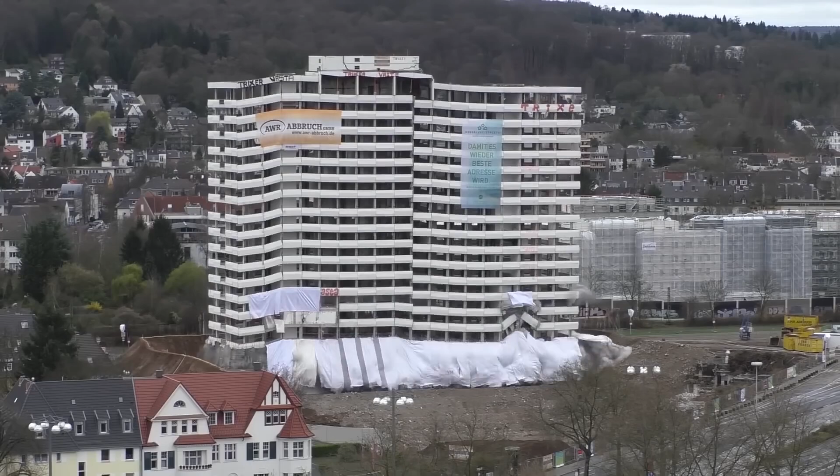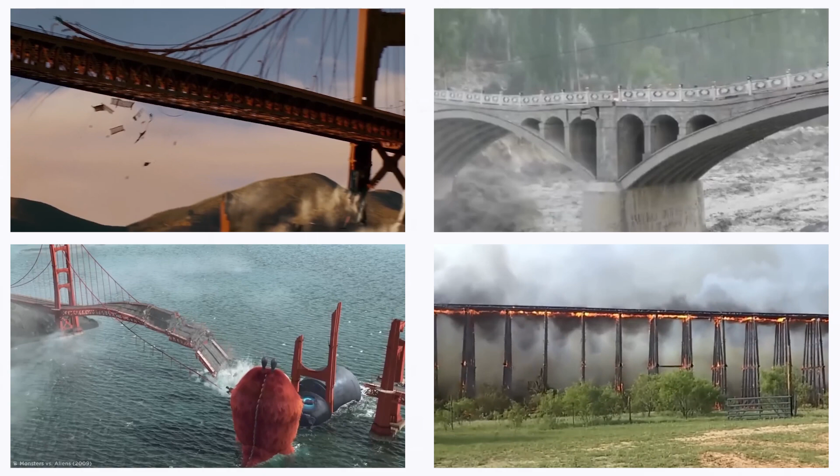Some building projects fail miserably, leaving behind shocking catastrophes that cost millions of dollars and cause terrible casualties. Others succeed in becoming masterpieces. From bridges that fail to open to buildings that lean dangerously to one side, some blunders are so big they become famous. Not only mistakes, but lessons picked up the hard way. A list of the 15 most egregious building blunders ever made.

Number 15, Sampoong Department Store.

What follows is a sad tale. It was entirely preventable, but hundreds of lives were sacrificed nevertheless. A landmark of South Korea's booming economy was the Sampoong Department Store in Seoul. A 5-story high-end retail store was crammed into what was originally a 4-story office building in 1987.

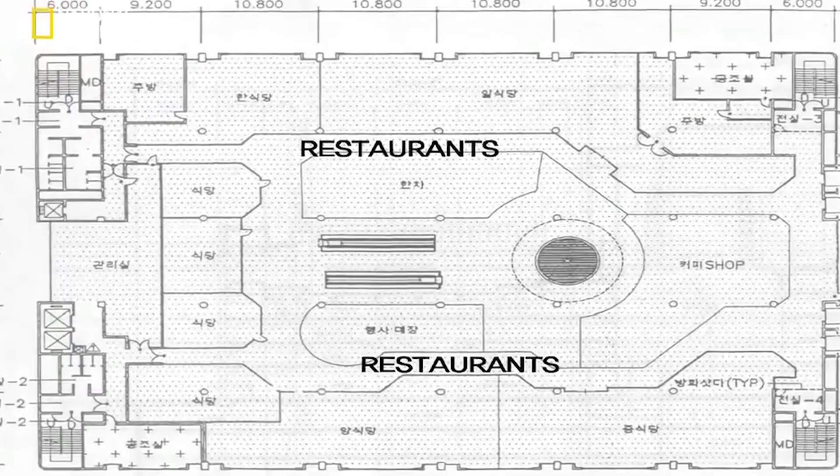The designs were revised on the fly during construction. In order to install the escalator rails, it was necessary to cut corners, such as removing support columns and placing a massive air conditioning unit on top of the building, which weighed 45 tons. The structure first welcomed 40,000 guests per day upon its opening in 1990. But these hasty adjustments led to serious flaws in the structure.

Tragically, 502 people were killed, and 937 were injured when the whole south wing of the building fell in less than 20 seconds on June 29, 1995, at 5:52 p.m. For its time, this building fall was the deadliest during a period of relative calm.

A disastrous pancaking effect occurred when the 5th story broke way under the weight of the air conditioning equipment and the building's defective construction. The worst thing is that management disregarded warning signs of fissures developing months prior to the accident. A combination of carelessness, avarice, and lax safety regulations led to this catastrophe.

It was not an accident. Discover the devastating consequences of taking shortcuts from South Korea to New Orleans.

Number 14. AquaDom. They boasted about it as the biggest cylindrical aquarium on Earth, but none anticipated that it would endanger the same species it was designed to save.

An impressive 82 feet in height, the Berlin AquaDom housed 1,500 tropical fish in 1 million litres of water and was a sight to see. With its breathtaking aquatic exhibit and elevator ride into its heart, the Radisson Blu Hotel's aquarium became a popular tourist destination after its 2003 opening.

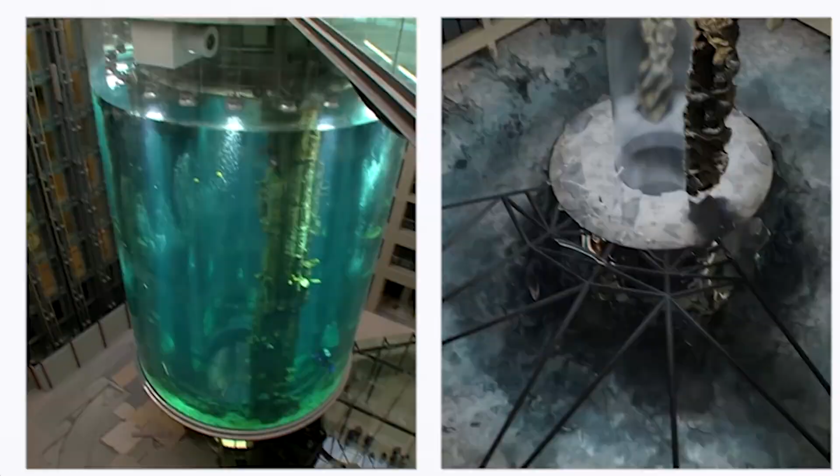In the end, it was determined that the collapse was caused by a long-lost structural defect in the floor. Despite its eye-catching appearance, the one-of-a-kind acrylic substance eventually developed microfractures due to the continual pressure from the water. These vulnerabilities were exacerbated by environmental conditions, such as temperature variations, which ultimately resulted in the catastrophic catastrophe.

A catastrophic event occurs when a tank explodes, while a tragic one occurs when a whole structure collapses. Number 13. Hyatt Regency walkway collapse.

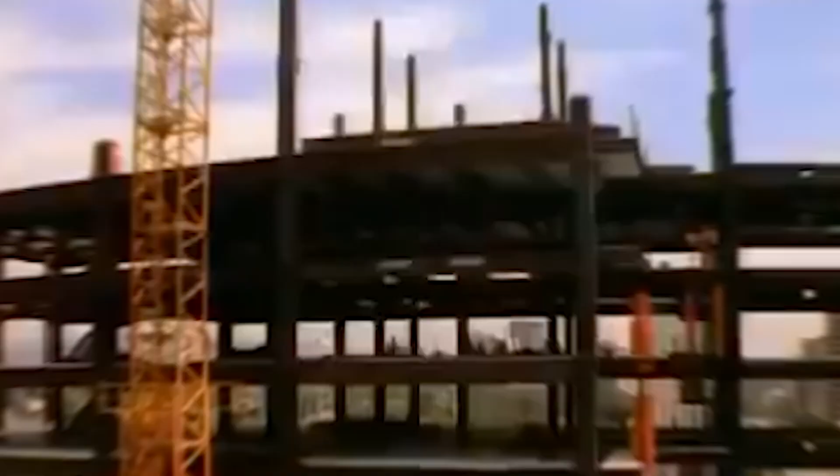A seemingly little alteration made to wow visitors in our next tale swiftly escalated into a catastrophic event. A breathtaking atrium with almost weightless pathways was a major selling point for the Kansas City, Missouri-based Hyatt Regency Hotel. Upon its opening in July 1980, the hotel immediately became associated with contemporary style and opulence. Unthinkable events occurred on July 17, 1981, during a bustling Friday night dance.

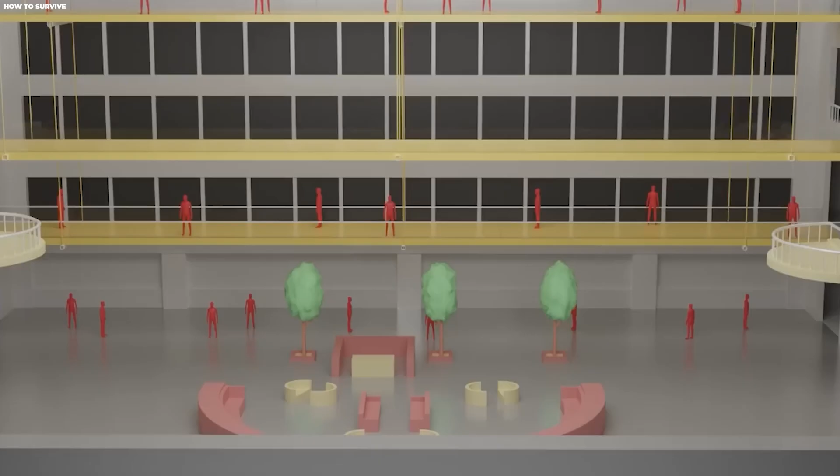Tragically, the partygoers' packed 2nd and 4th story walkways crashed into the lobby below. With 114 fatalities and nearly 200 injuries in just a few seconds, it was the worst building collapse in United States history at the time.

What went wrong? A crucial modification to the walkway support system structure was uncovered during the examination. Constructional changes necessitated the addition of 2 sets of rods, one from the ceiling to the 4th floor walkway and the other linking the fourth-floor walkway to the second-floor walkway. These were substitutes for the original plan, which called for a single set of hanger rods suspended from the ceiling.

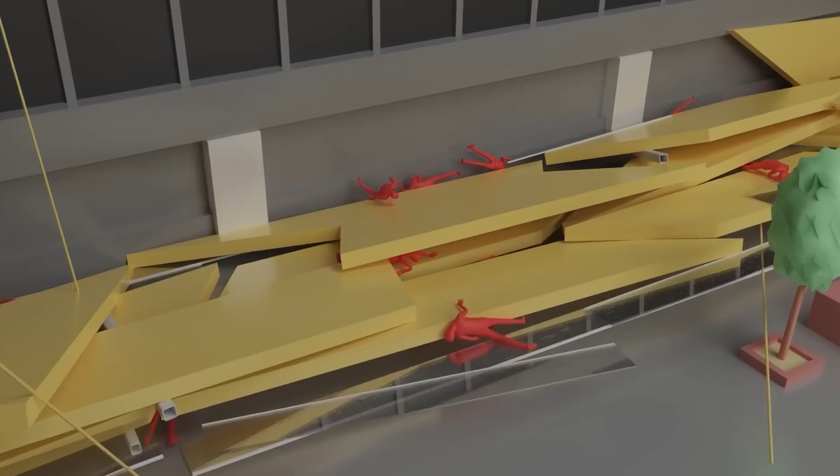This apparently insignificant modification caused the top walkway's connecting points to bear twice as much weight as they were originally intended to. Tragically, the walkways collapsed onto those below as a consequence of the connecting points failing.

Changes in engineering standards and construction rules were implemented on a national level in response to the catastrophe, which highlighted the need for engineers to guarantee the safety of their projects.

That disastrous shift caused anarchy, and as you'll see, it wasn't the first time carelessness had disastrous consequences. Number 12: Lotus Riverside Complex.

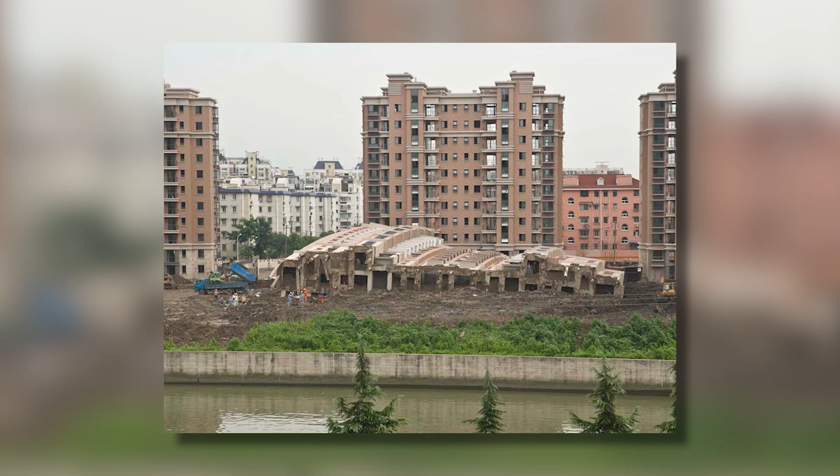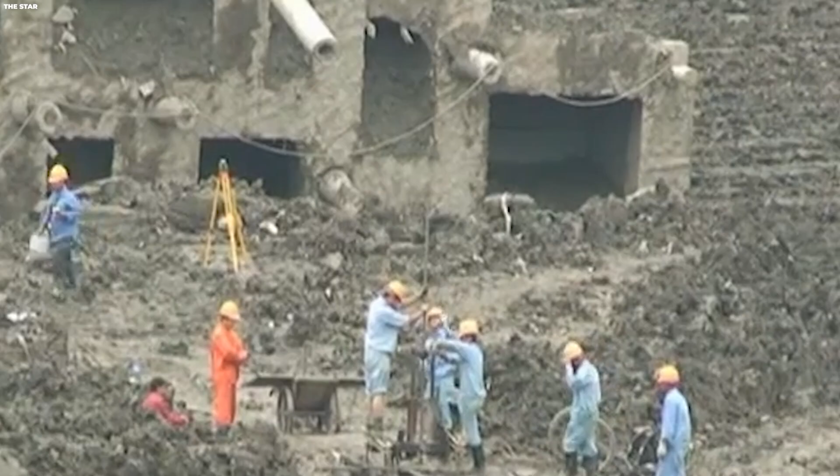How is it possible for a tall, sturdy structure to unexpectedly topple down like a massive domino without crashing to the ground? The 13 skyscrapers that made up Shanghai's Lotus Riverside Complex represented the pinnacle of contemporary city life. Built to accommodate the city's fast growth, the project's high-end apartments were ready for occupancy in 2009. Buyers were drawn to the Meidu Real Estate Company's complex in a flash because of its prime location and stunning architecture.

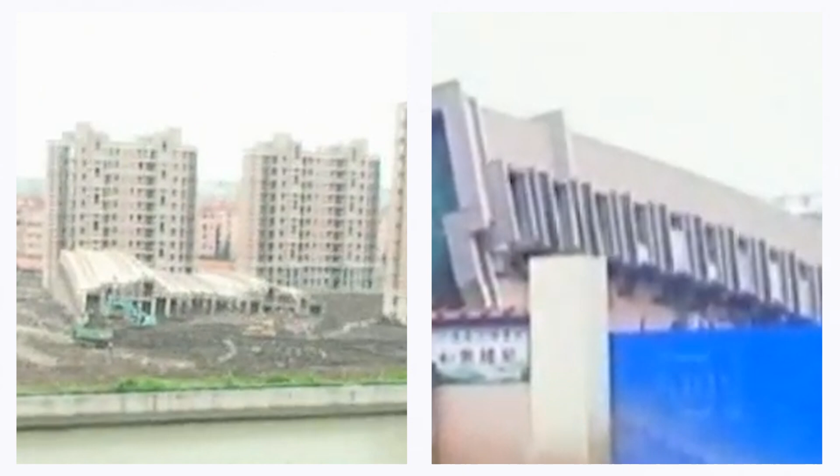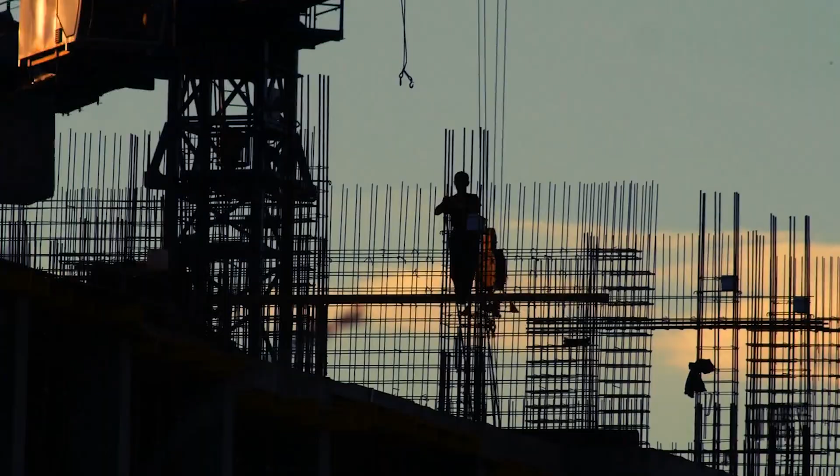Until June 27, 2009, everything seemed to be going swimmingly. One of the structures toppled over that morning, ripped from its base by nothing more than gravity and a catastrophic oversight. There were no explosions or earthquakes involved. The building's foundation had become weaker due to excavation work for an underground garage adjacent to it, which had displaced large quantities of dirt. This surprising error during construction was the main reason.

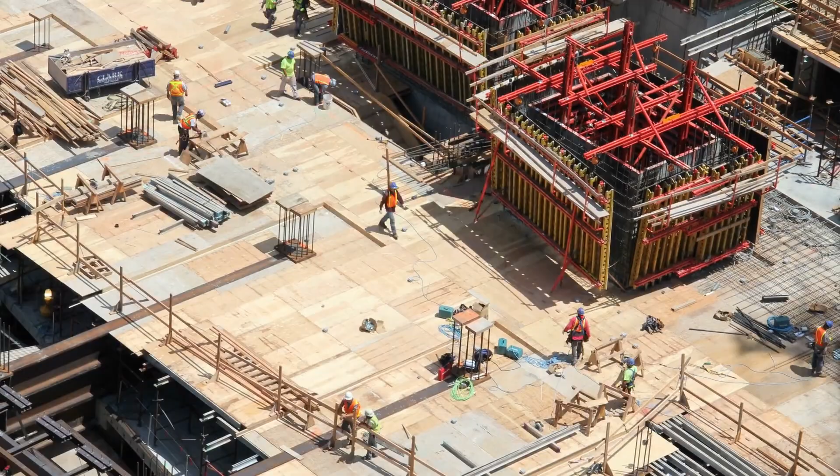The situation was made much worse by the severe rains that preceded the collapse, since the already weakened soil was unable to hold the weight of the building. Legal action and inquiries ensued from this tragedy, which should serve as a stark warning to anyone involved in building in fast-developing urban areas. As this structure crumbled, our subsequent catastrophe surged upon us like a tidal wave.

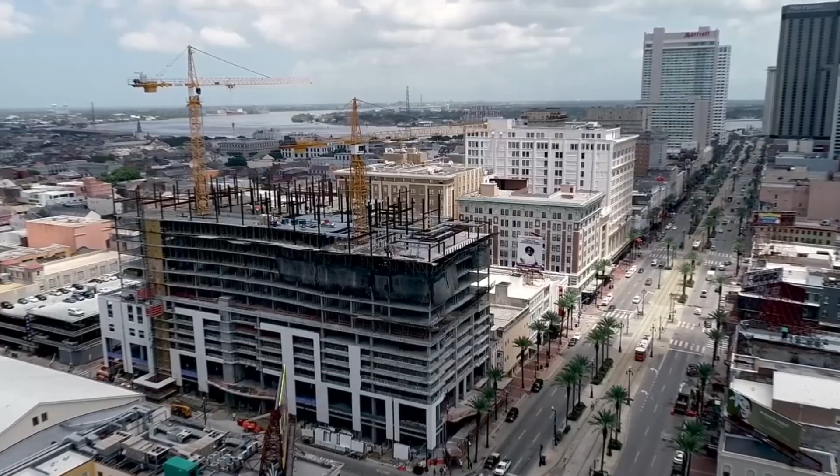Number 11: Hard Rock Hotel Collapse. In a project worth millions of dollars, what are the consequences of taking shortcuts? This was a recipe for catastrophe for the Hard Rock Hotel.

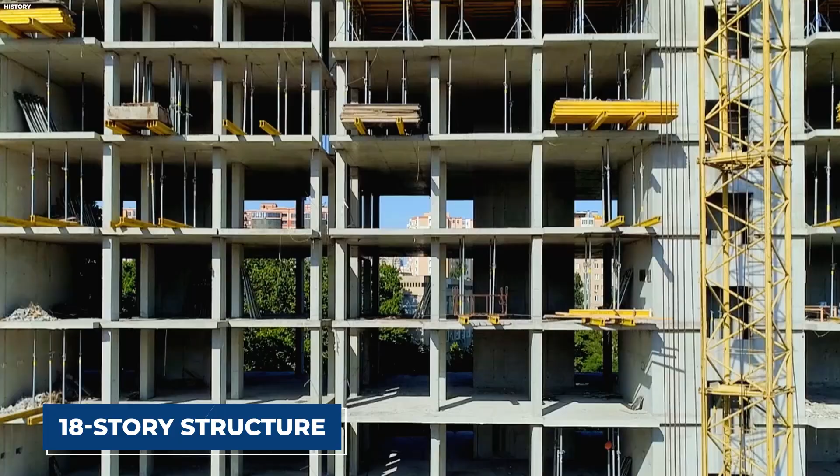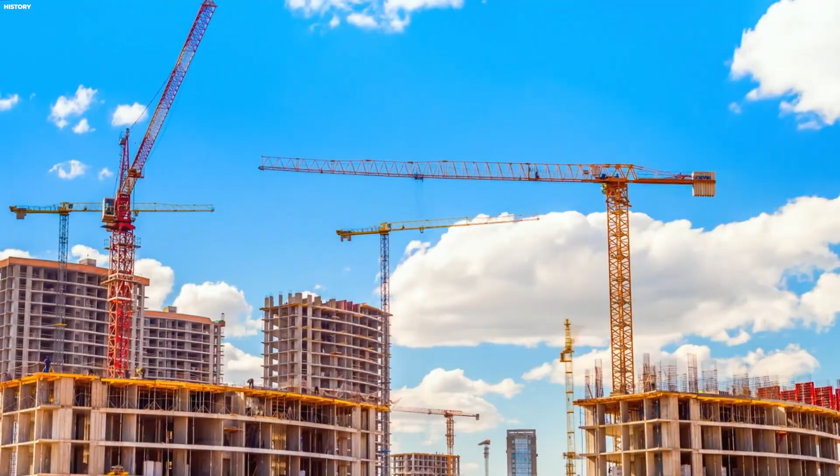An opulent 18-story structure, the Hard Rock Hotel was intended to adorn the lively Canal Street with a touch of contemporary style. A rooftop bar and pool deck with breathtaking views of the city were part of the ambitious plans that started construction in 2018. Already a prominent feature of the skyline as the project drew closer in 2019, the building was almost finished.

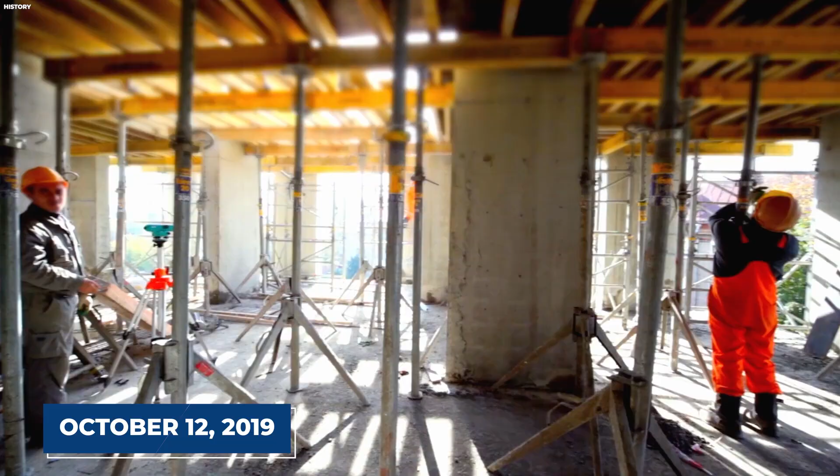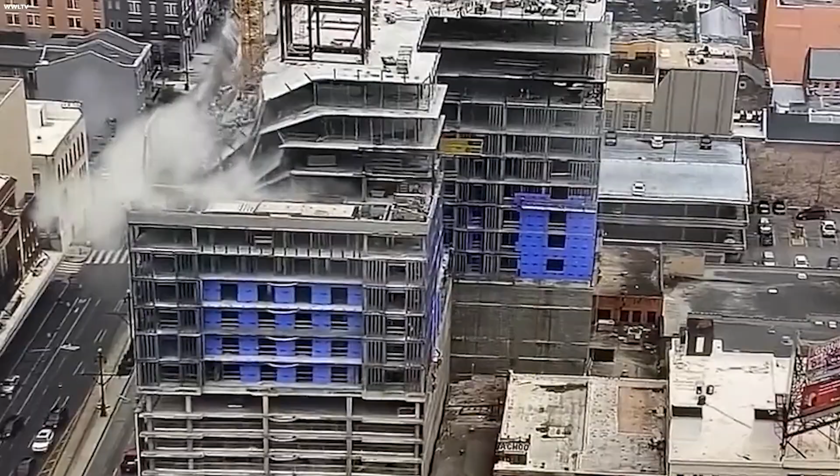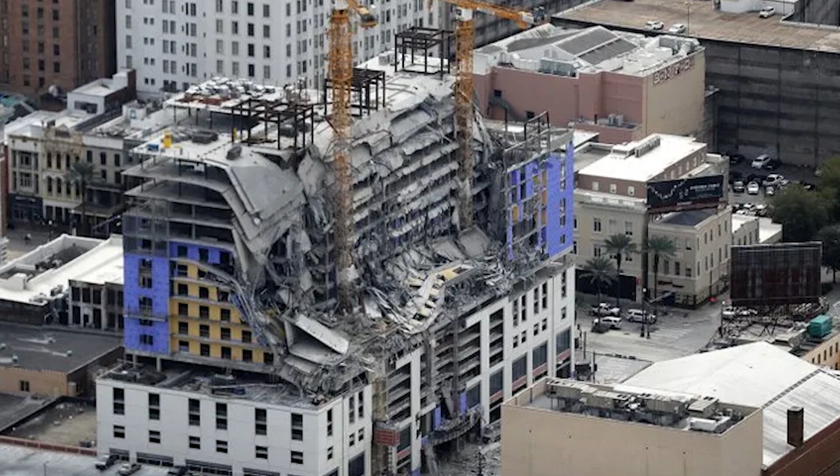On October 12, 2019, nonetheless, tragedy struck. Three employees were killed, and scores more injured, when the upper floors of the partially completed structure abruptly gave way, releasing a torrent of concrete and steel. As a section of the structure collapsed, ensnaring individuals under its rubble, debris rained down on the streets below. The population was shocked when rescue operations were hindered because the building remained dangerously unstable.

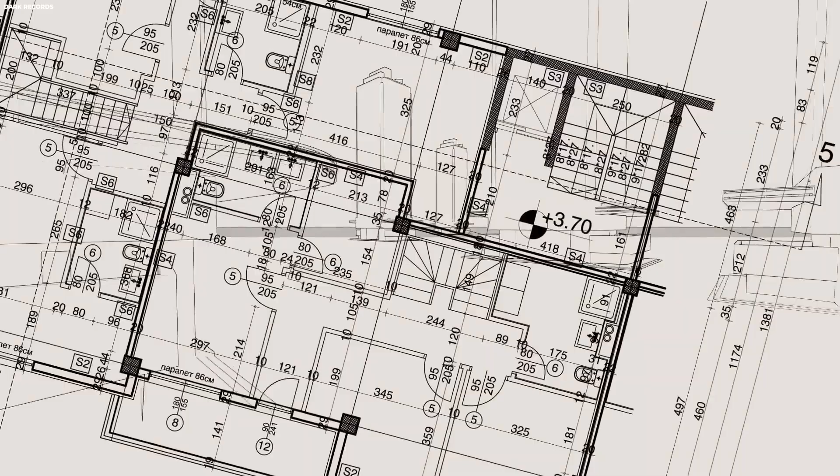Attempts to reduce costs led to the discovery of a serious defect. To allow for taller ceilings without increasing the building's total height, the steel beams on the 16th and 17th floors were significantly decreased in size. The higher floors collapsed due to the overstressing of these smaller beams, which were originally meant to support far less weight than what was really needed. According to experts, the beams were 300% overstressed, which caused the calamity.

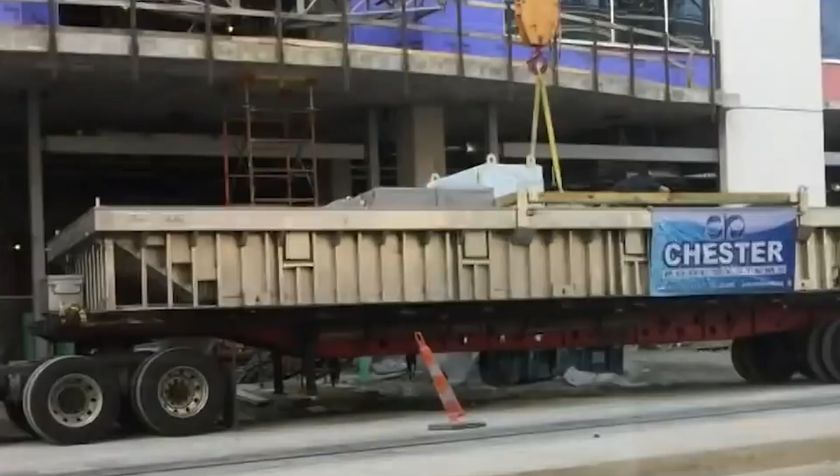But slacking off is nothing new. Negligence has disastrous consequences, as we will see in our following chapter. Number 10: The Walkie Scorchie.

Now we may discuss a structure that became an unintentional death ray despite its attention-grabbing architecture. 20 Fenchurch Street, whose top-heavy shape earned it the nickname the Walkie Scorchie, cost more than £200 million to construct and was finished in 2014. The bulbous form of this London commercial skyscraper, created by architect Rafael Viñoly, is instantly recognizable.

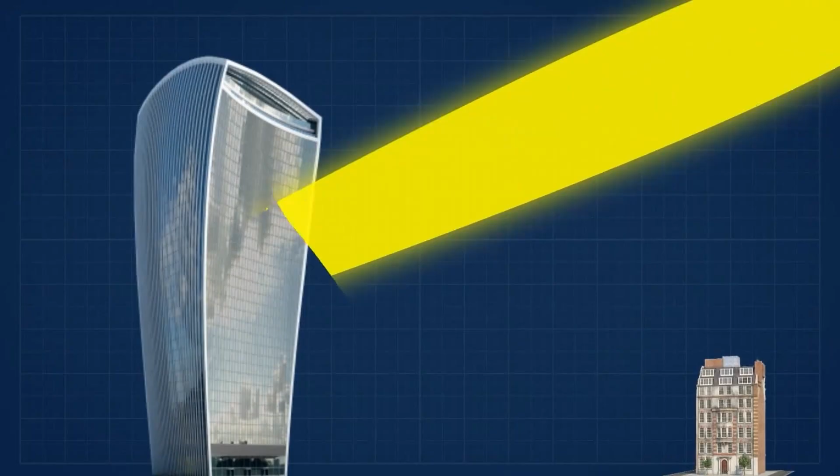Its top floors stretch outward, providing enough space for office rents and a breathtaking sky garden. But the Walkie Scorchie was a much less endearing moniker that the structure swiftly acquired. The building's concave glass exterior reflected and focused sunlight into the streets below, creating an unintended effect similar to that of a large concave mirror.

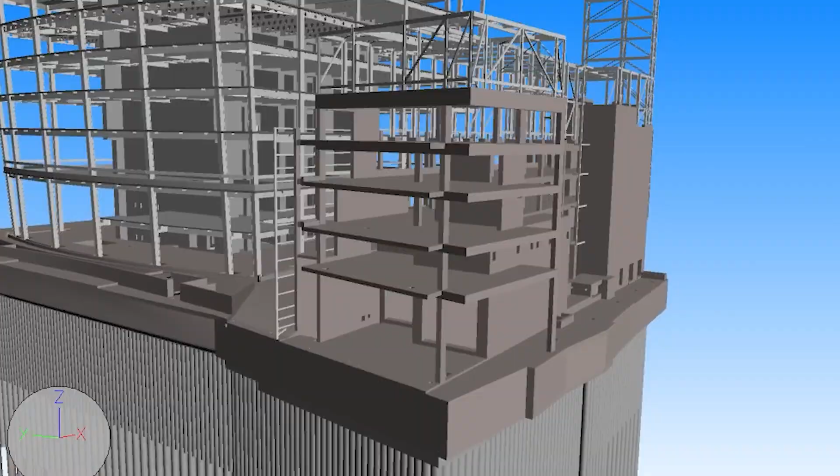Street temperatures might reach 117 degrees Celsius, 243 degrees Fahrenheit, in the summer due to the strong sunshine, which allegedly melted components of a parked Jaguar and burnt the surfaces of adjacent buildings. A local Londoner immediately dubbed the building the Frying Scraper. In order to alleviate the severe glare, quick actions were made to set up temporary screens, and subsequently, a brise soleil, a permanent sunshade, was included.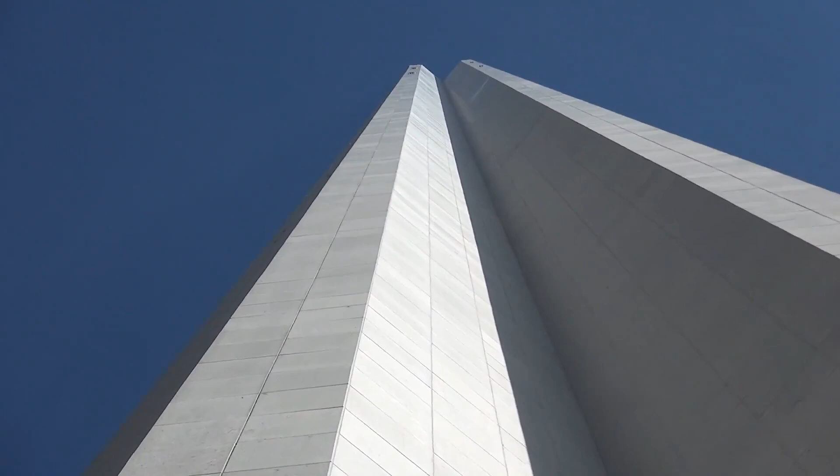With its striking facade of Italian Carrara marble, the 1973-built Aon Center in Chicago stands out from its predecessor, the Standard Oil Building. What made the structure stand out, the use of marble, also became its undoing, a huge mishap.

The marble exterior started to show signs of fissures just a year after it was finished. In some instances, whole panels, each weighing more than 300 pounds, fell off the structure, creating a significant danger for the region below. The delicate marble couldn't withstand the wildly fluctuating temperatures in Chicago, despite its aesthetic appeal.

The expansion and contraction of the marble over the hot summers and chilly winters caused the fissures. The remedy ended up being a full refacing of the whole structure, after many efforts at interim remedies such as putting steel straps to keep the panels in place failed. Sturdier Mount Airy granite was used in lieu of the original highly esteemed marble. An astounding $80 million, more than half the building's initial cost, was spent on the recladding endeavor in the early 1990s.

What transpired during the construction of the Sydney Opera House would blow your mind if you thought the troubles at the Aon Center were expensive. Number 7, Teton Dam disaster.

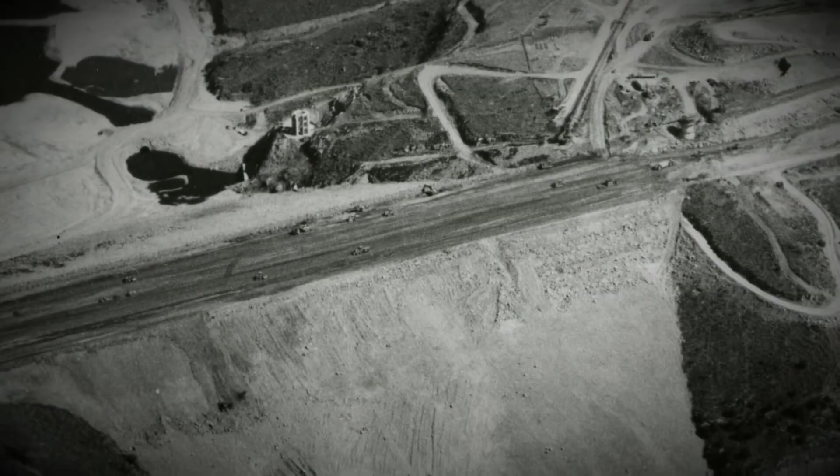A little oversight was sufficient to transform the Teton Dam into a destructive powerhouse, concealed behind its majestic walls. This dam, situated in southern Idaho, was built by the United States Bureau of Reclamation from 1972 to 1976. It was a massive undertaking with a height of 305 feet and a width of 3,000 feet, intended to manage floods and provide irrigation to the neighboring regions.

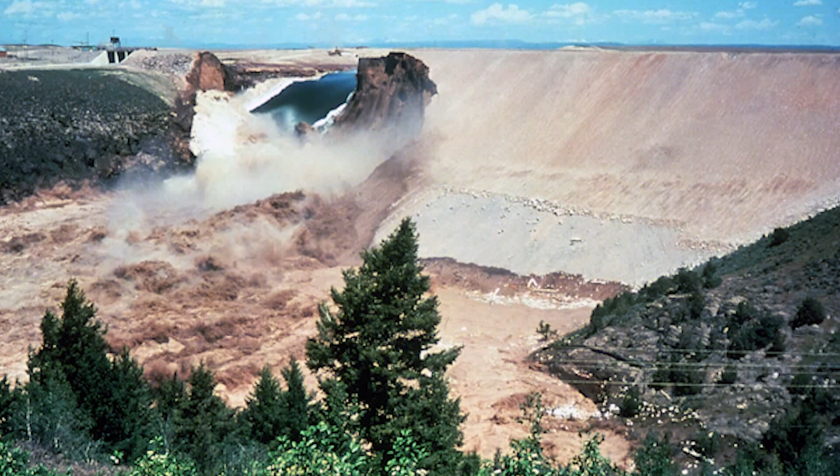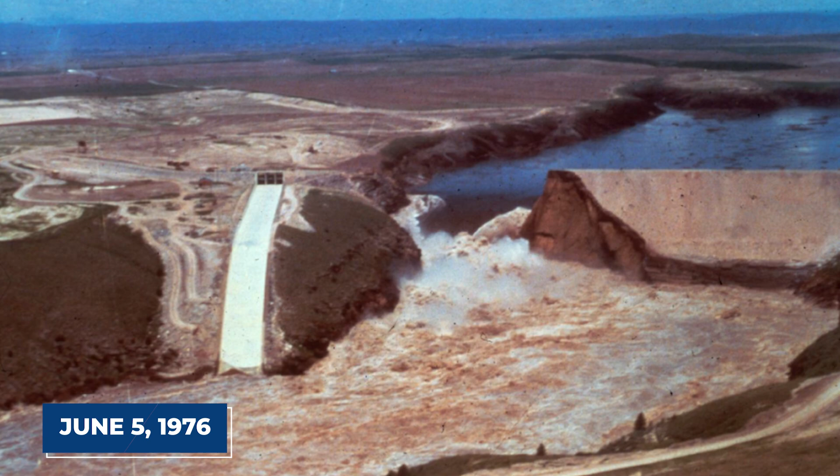The architecture of the dam was revolutionary for its time since it used compacted earth and rock layers. On the other hand, crews discovered minor dam leaks on June 5, 1976, when the reservoir was initially approaching its maximum capacity. They worked hard to seal the leaks, but it became clear that things were worse than they had anticipated.

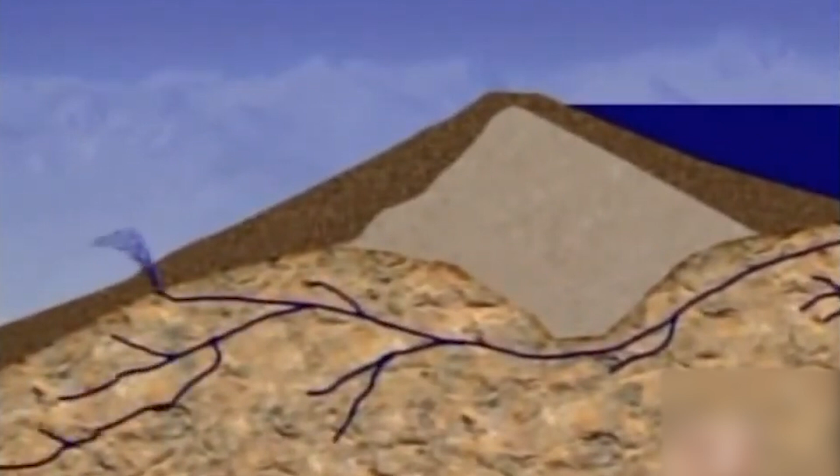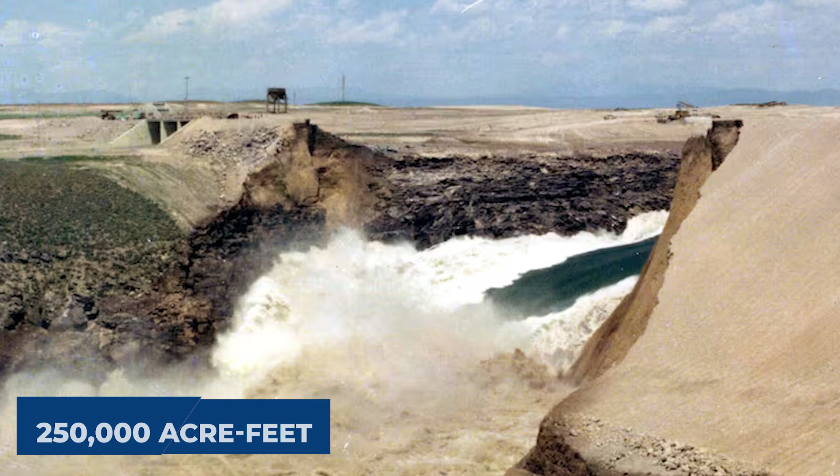Rexburg and Sugar City were hit hard when, by midday, a huge hole was opened up, and within hours, more than 250,000 acre-feet of water was spilled downstream. A 15-foot-tall water wall ripped across the region, killing 11 people, displacing 13,000 and damaging more than $2 billion.

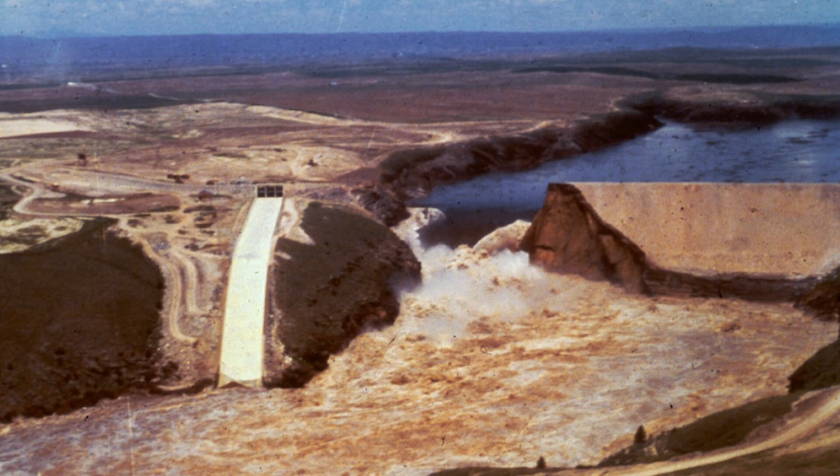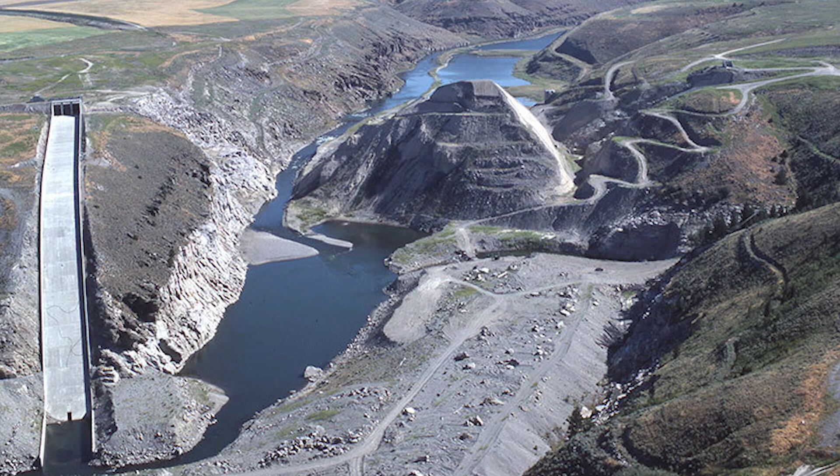Seepage was a common problem since the dam was constructed on very porous rock. The building methods were also subpar, leading to water seepage and internal erosion caused by the inadequately compacted earth and rock used to build the dam's core. The quick increase in water levels, which put more strain on the dam, was another something the engineers had overlooked.

In our following chapter, we'll see that water isn't the only adversary. The wind may be just as bad. Number 6, Tacoma Narrows Bridge. In the span of a few months, how can an engineering marvel worth millions of dollars become a twisted ruin?

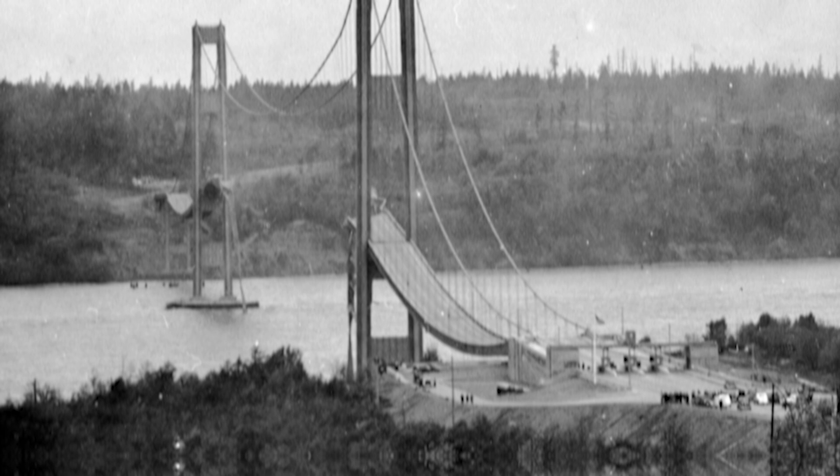Stunning and spanning 2,800 feet over Washington State's Puget Sound, the Tacoma Narrows Bridge was finished in July 1940. The Galloping Gertie Bridge, so called because of its propensity to wobble in the wind, was the third longest suspension bridge in the world when it was constructed. The sleek modern form of the bridge was an attempt to save expenses without sacrificing efficiency.

The most recent developments in the theory of suspension bridges were included into the bridge's design by Léon Moisseiff. Its minimalist, cutting-edge style was typical of the modern era. Its attractiveness was also lauded. One of the most infamous architectural blunders in history was about to happen because of a crucial omission that was hiding behind that sophisticated facade.

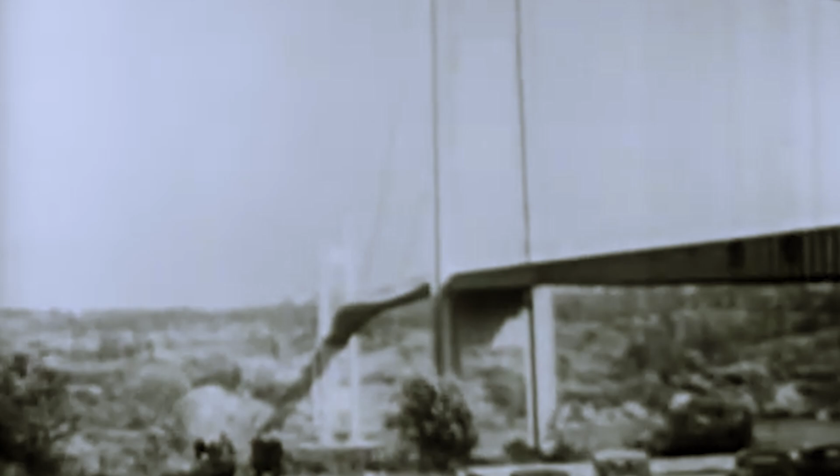On November 7, 1940, a mere 4 months after its grand debut, tragedy befell. The bridge twisted dramatically due to winds approaching 40 miles per hour, and the whole deck swayed like a ribbon in the wind. The Tacoma Narrows Bridge gave way to the icy waters of Puget Sound after just a few hours of being bent beyond support.

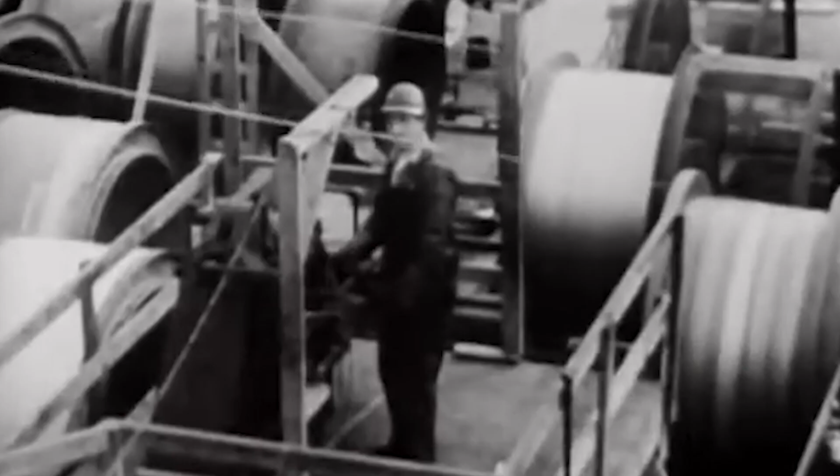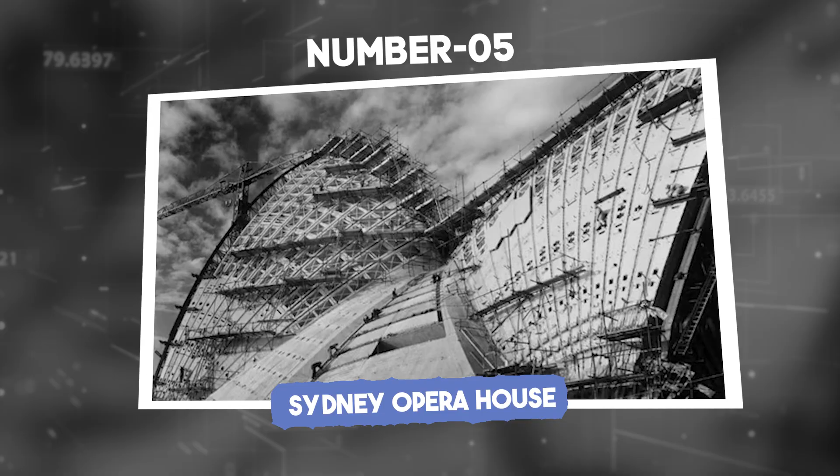The original estimate for the duration and budget of this structure was 4 years and 7 million Australian dollars. It was finally finished in 1973. The actual outcome was that the project went 10 years over schedule and approximately 1,300% over budget, clocking in at a whopping 100 million Australian dollars.

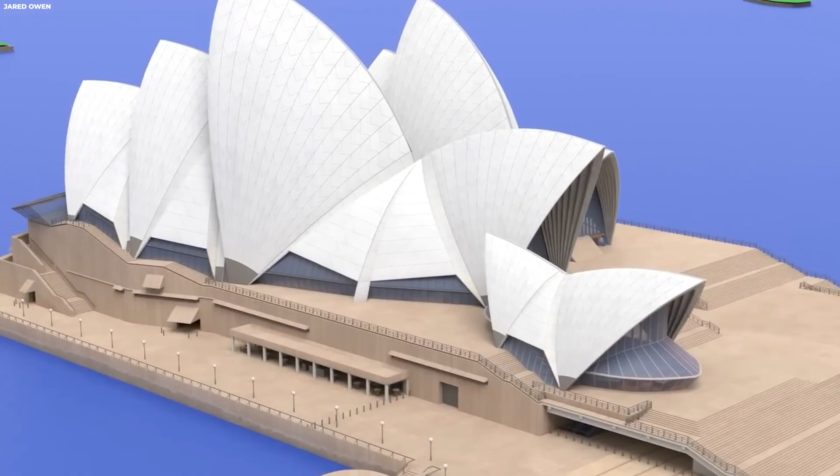The unique idea of the Opera House, which was designed by Danish architect Jørn Utzon, had several technical hurdles, resulting in many redesigns, most notably for its famous concrete shells. Because of these concerns, the then new method for solving structural issues in large-scale construction, computer modeling, had to be used. Significant internal strife added insult to injury in the form of budget overruns.

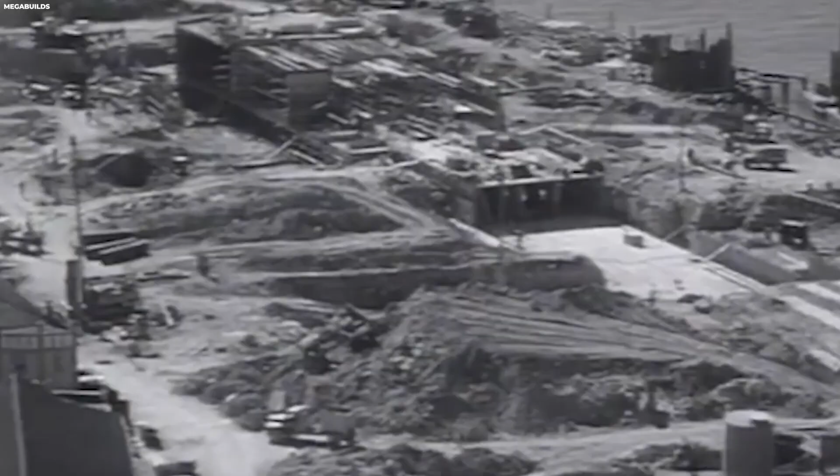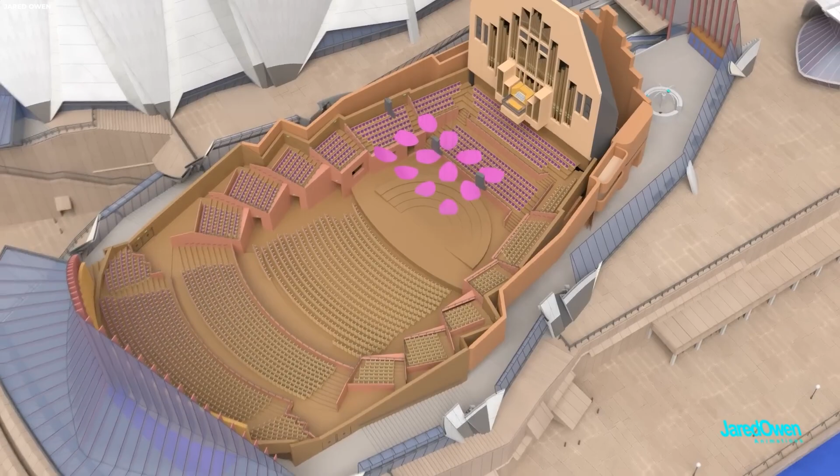The interior design was left incomplete when Utzon quit in 1966 due to political issues. The acoustics were severely compromised as a consequence of these shortcomings. Musicians often griped about hardly being able to hear their own instruments due to the notoriously poor sound quality at the venue, which ironically was intended to showcase music and performance.

Over the last several years, the Opera House spent approximately $300 million AUD undergoing extensive renovations to address these concerns. To enhance the sound quality and functionality, new acoustic panels and adjustable sound reflectors were installed as part of these modifications. In spite of its troubled beginnings, the Opera House has persevered to become a contemporary architectural marvel and a UNESCO World Heritage Site. The next building wasn't as fortunate as the Opera House, which did succeed in the end.

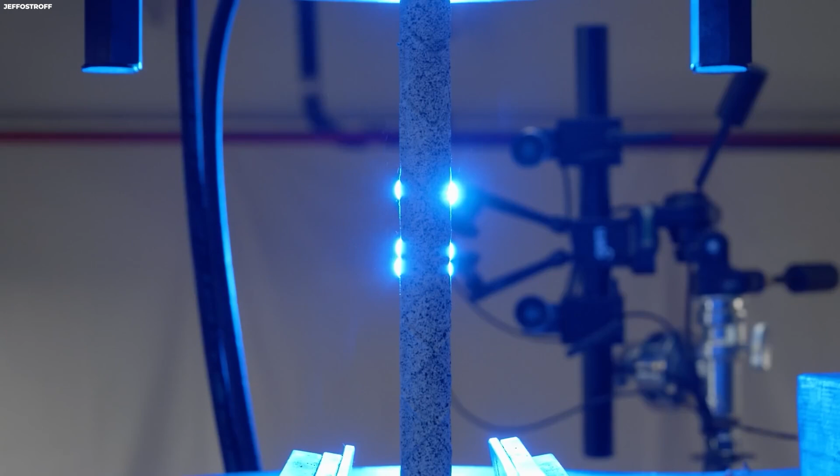Number 4, Champlain Towers. The seaside fantasy that was our final building for today had a secret weakness that nobody saw until it was too late. A 12-story condo building in the Surfside district of Florida, Champlain Towers South, was completed in 1981. The building material, steel-reinforced concrete, was chosen for its durability and sturdiness. Those in search of beach life and breathtaking vistas flocked to the 136-unit complex.

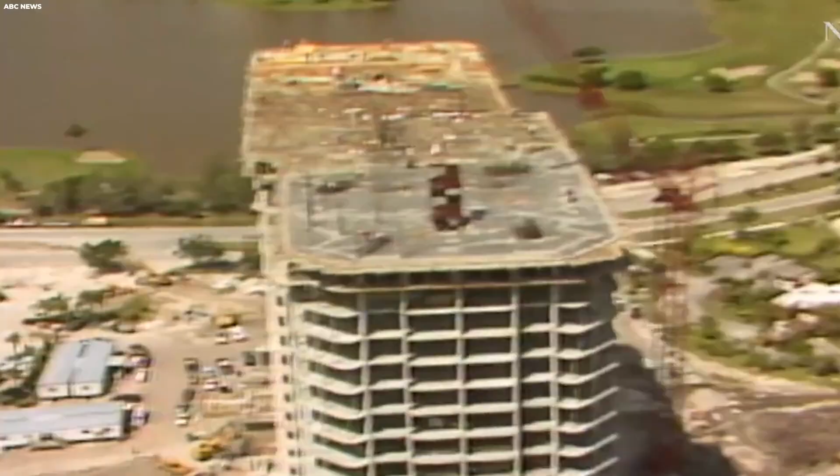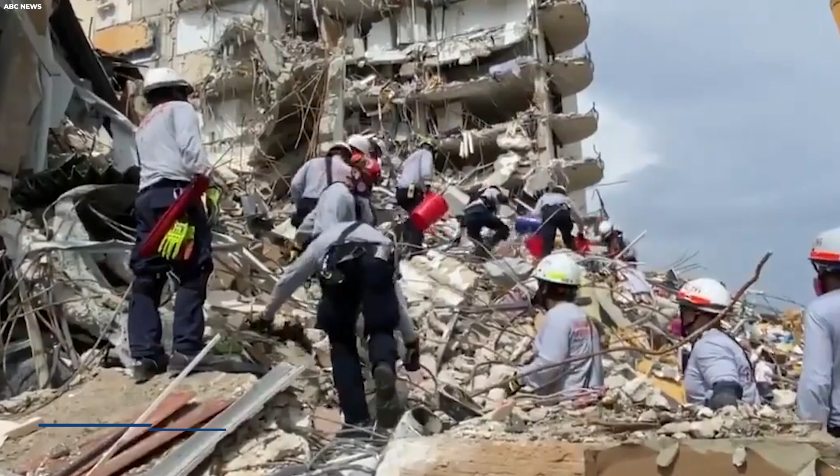Standing tall beside the Atlantic Ocean, the tower betrayed its attraction by concealing a ticking time bomb. At 1:22 a.m. on June 24, 2021, tragedy occurred in the early hours of the day. Less than 12 seconds after the building's fall, the whole complex was reduced to ruins. There were 98 fatalities and many injuries caused by the collapse.

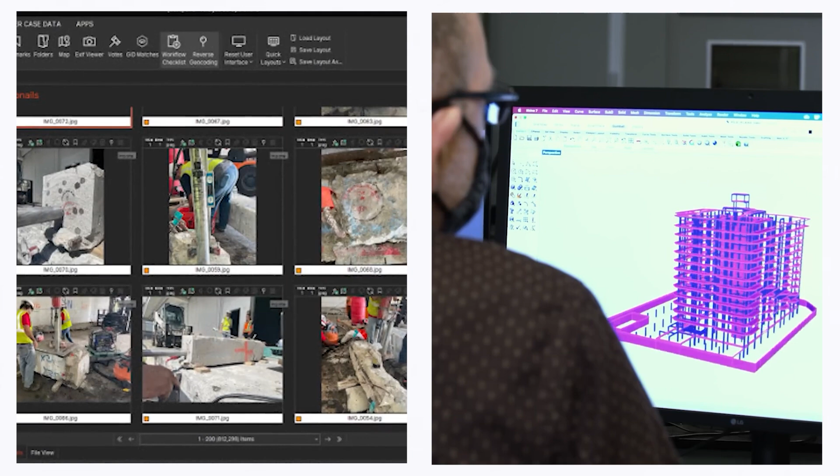A troubling concoction of elements was uncovered during investigations. There have been reports of major structural problems with the building dating back to 2018. The concrete slab below the pool had taken a major beating from water seeping in from the deck and the constant leaks. The steel reinforcing was rusting and the concrete was crumbling. The building's foundation, which rested on reclaimed wetlands, added insult to injury in terms of sinking.

Champlain Towers South was one of the most deadly buildings in U.S. history when it collapsed because of the delayed repairs after the 2018 warnings. Number 3, Seoul Bridge Collapse.

The next one depicts the terrible symbolism of the challenges brought about by the rapid urbanization in South Korea, a bridge that was constructed to link two of the busiest regions of Seoul. A 48-meter span of Seoul's Seongsu Bridge gave way on October 21, 1994, sending cars crashing into the Han River during rush hour.

Tragically, 32 people lost their lives and 17 were wounded when a bus crashed into the river. The majority of the victims were passengers on board the bus. The fact that it was avoidable just adds to the horror of what happened. A number of notifications of bridge fractures were received in the hours leading up to the collapse, but no prompt measures were implemented. The Seongsu Bridge was opened to traffic in 1979, and has a daily capacity of 80,000 cars.

Daily traffic increased to about 160,000 cars by the early 1990s. Inadequate maintenance, rusty pins, bad welding, and shoddy construction all contributed to the collapse. The structural breakdown was caused by excessive traffic, which exceeded the bridge's initial capacity.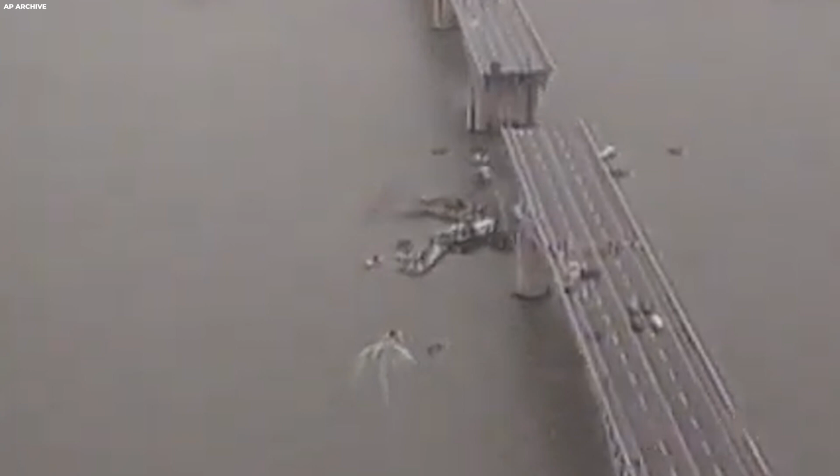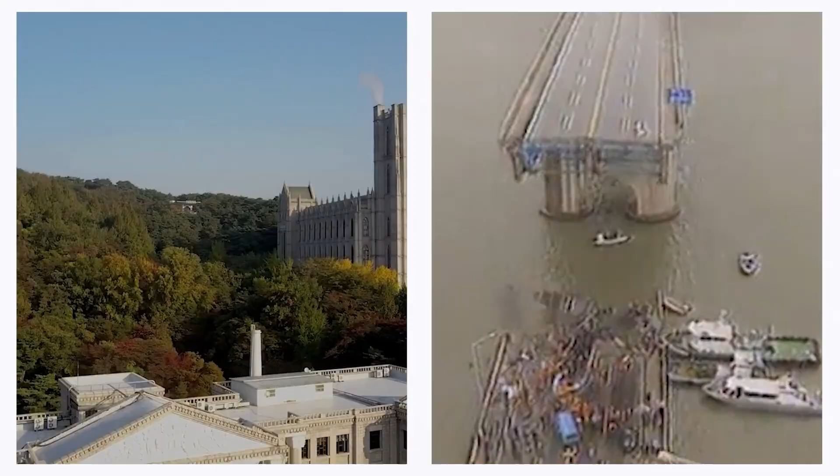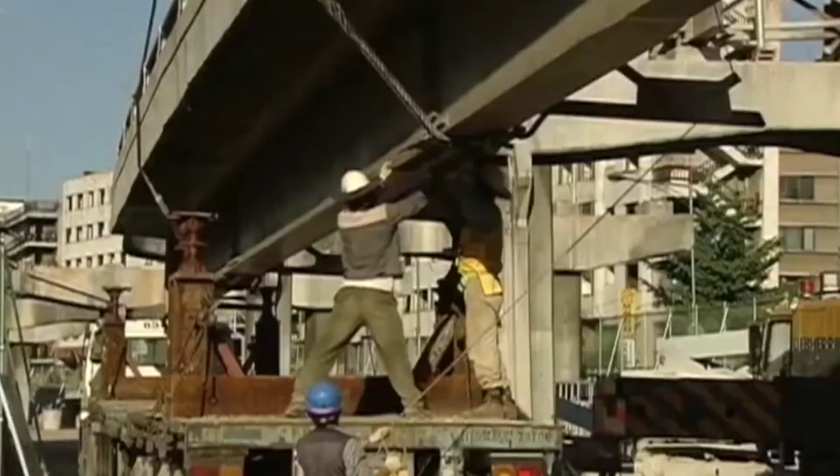The investigation also found that the bridge had received almost no maintenance throughout its 15 years of service. The Seongsu Bridge disaster demonstrated the perils of putting rapid urbanization ahead of public safety. It revealed problems with South Korea's Miracle on the Han River project, which prioritized short-term gains over long-term stability in order to save money. A sea change occurred in the way the government handled infrastructure projects after this tragedy, resulting in major changes to the country's building rules.

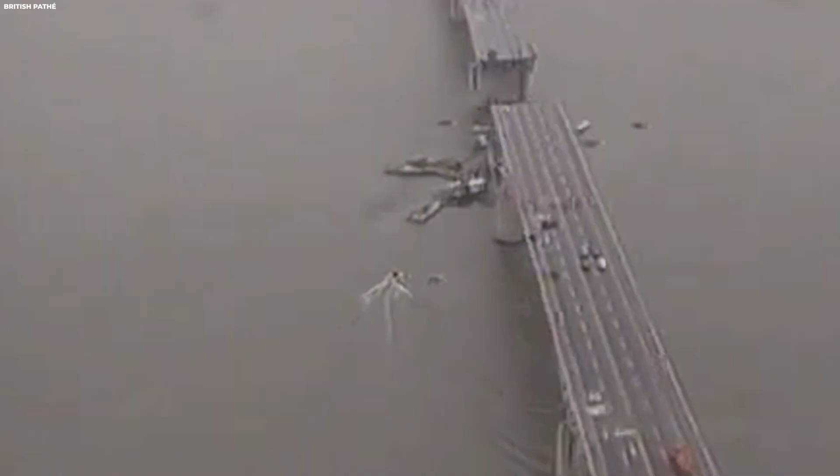A great price was paid for this lesson. Many lives were lost. In 1997, after extensive reconstruction, the bridge was reopened to traffic with upgraded safety features. Tragically, this bridge fall was the first of many casualties caused by subsequent calamities.

Number 2. Leaning Tower of Pisa. The Leaning Tower of Pisa, perhaps the most famous architectural disaster in human history. It seems to be a work of art of medieval architecture at first sight, but then you detect the obvious flaw. No, it wasn't the original idea.

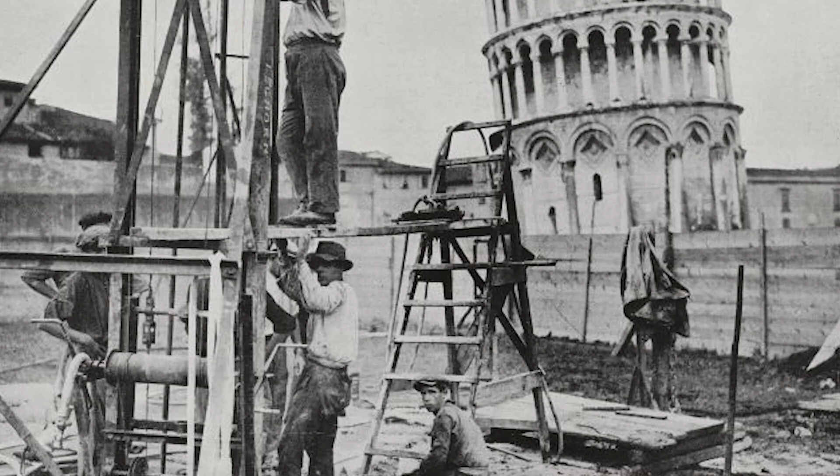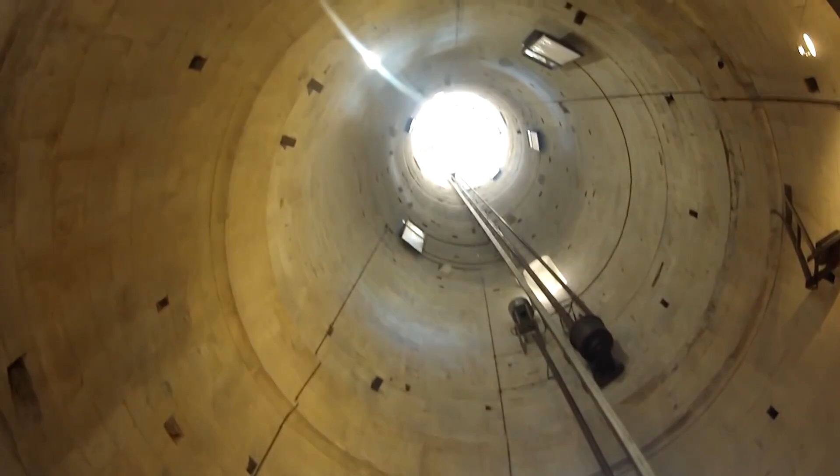In 1173, work began on this independent bell tower that would become known as the Leaning Tower of Pisa. Up until they reached the third story, the builders made steady progress. Then disaster struck. Changes started to occur in the subsurface. The foundation, which was just 3 meters deep and sitting on unstable, mushy soil, was the cause. The tower began to tilt before construction was even halfway complete due to this crucial error.

Conflicts delayed construction for over a century before work could begin again. Surprisingly, the building was spared from imminent collapse because the delays allowed the earth time to settle. When construction on the tower was wrapped up in 1372, its tilt had already become instantly recognizable. The lean became more severe over the years, reaching a precarious 5.5 degrees in the 1800s and giving rise to genuine concerns of collapse in the 1900s.

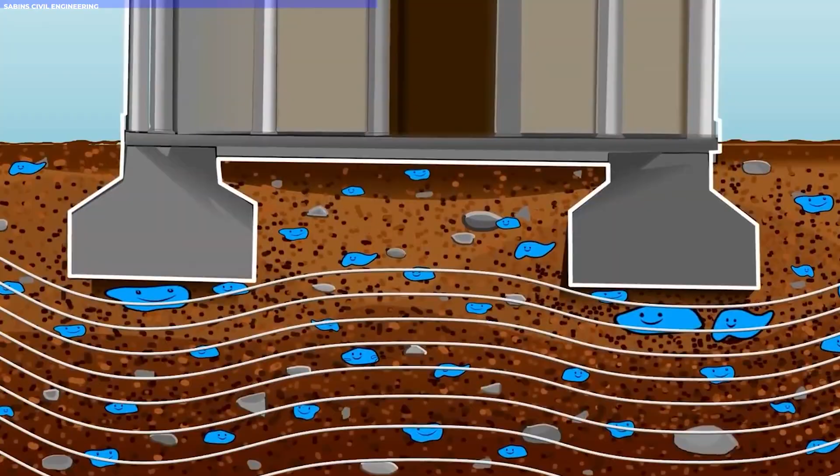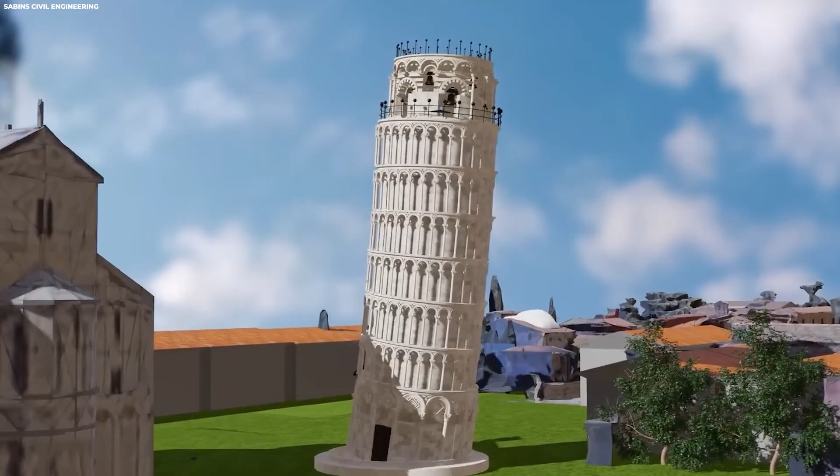From 1993 to 2001, engineers spearheaded a huge restoration operation, including cutting-edge techniques such as soil extraction and lead counterweights to secure the building. Thanks to these measures, the tower's tilt has been decreased to 3.97 degrees, and specialists now predict that it will remain safe for another 300 years or more.

Fascinatingly, however, the tower has been spared seismic damage due to the relatively soft ground underneath it. The tower was spared heavy damage from the seismic shocks of 4 big earthquakes because the shifting soil has absorbed them. The lean may have been a disastrous decision, but it has also had an unexpected but significant impact on the stability of the Leaning Tower of Pisa.

However, how are errors handled when they occur at a later stage? Next, we will examine a different example.

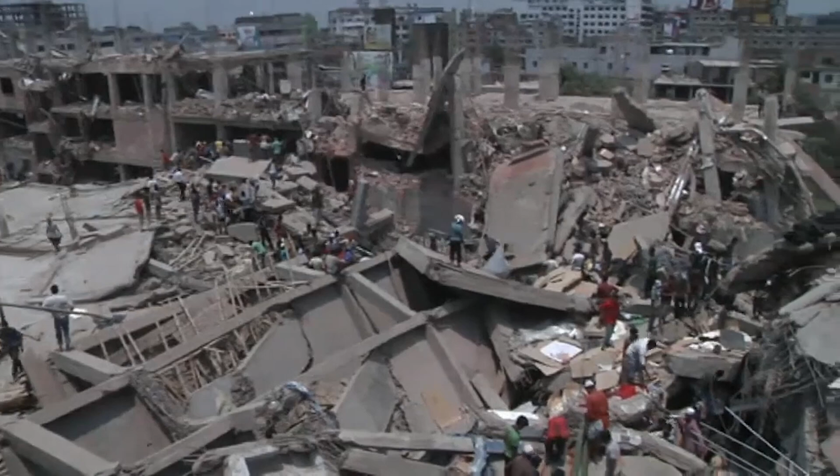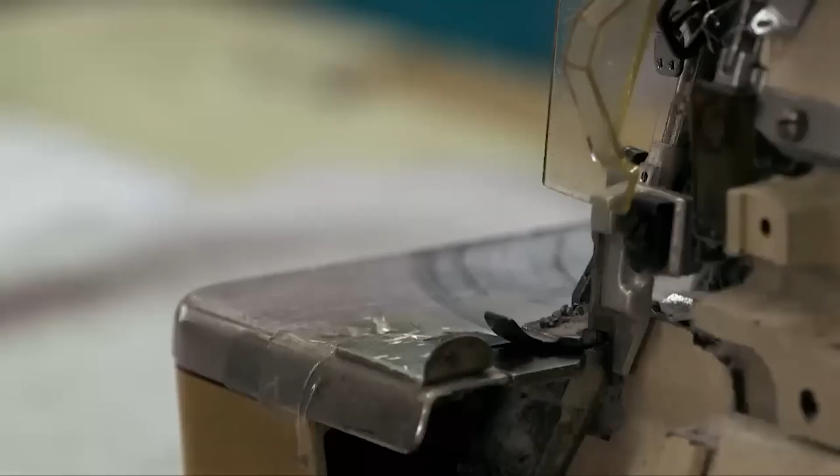Number 1. Rana Plaza. Rana Plaza seemed to be a typical busy day on April 24, 2013, but something terrible was hiding under the surface, and it would eventually break the lives of thousands of people. 5 garment factories, situated in the 8-story Rana Plaza in Dhaka, Bangladesh's Savar district, produced goods for well-known Western companies such as Primark, Walmart, and Benetton.

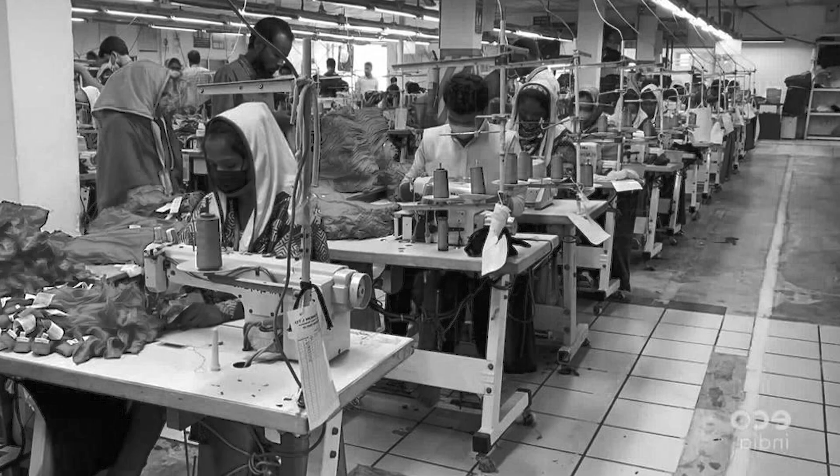The construction of the building was never designed to support the weight and vibration of large industrial equipment. It was originally intended for use as stores and offices. However, the owners recognized an opportunity and turned the factory into a garment manufacturing plant, illegally adding 4 floors without the necessary permissions. Employees were removed from the building after discovering wall fissures on April 23, 2013.

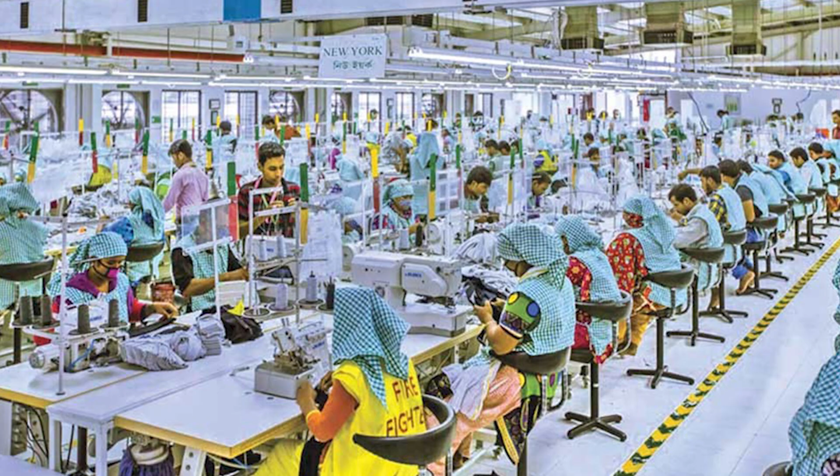However, plant management were under pressure to fulfill production targets and forced the workers to return the next day, threatening to withhold a month's salaries despite the obvious danger indicators. It was a deadly choice. A total of 1,134 people were killed, and nearly 2,500 were injured when the building fell on April 24, 2013, at 8:57 a.m. It went down in history as one of the most devastating industrial catastrophes.

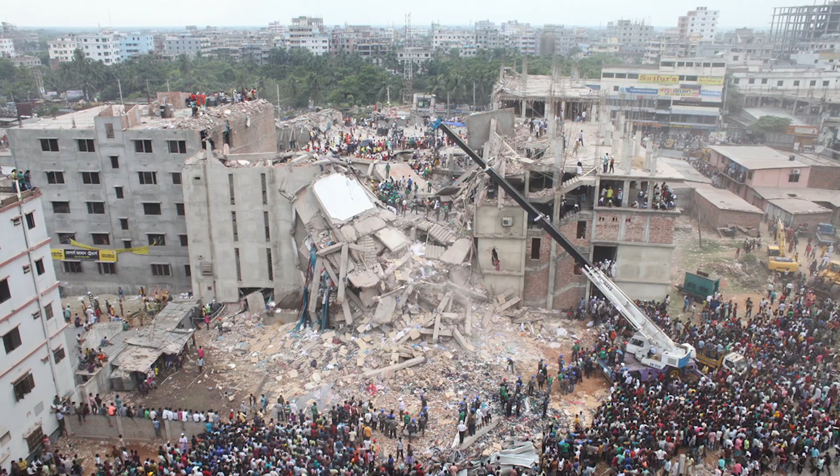The building's structural integrity was damaged during construction due to the use of poor materials and the unstable, filled-in ground upon which it was built, according to investigations. The building gave way due to the vibrations from the equipment and generators, as well as the extra weight from the upper stories.

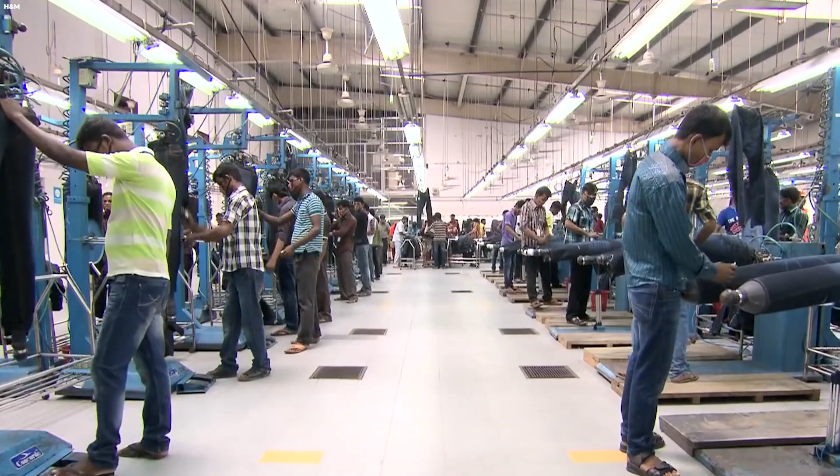There were major changes brought about by the tragedy, notwithstanding the terrible death toll. Over 2.5 million workers in 1,600 industries had their safety enhanced as a consequence of the establishment of the Bangladesh Accord on Fire and Building Safety. Even though the Rana Plaza tragedy rocked the globe, our last tale nonetheless left a whole town in grief.